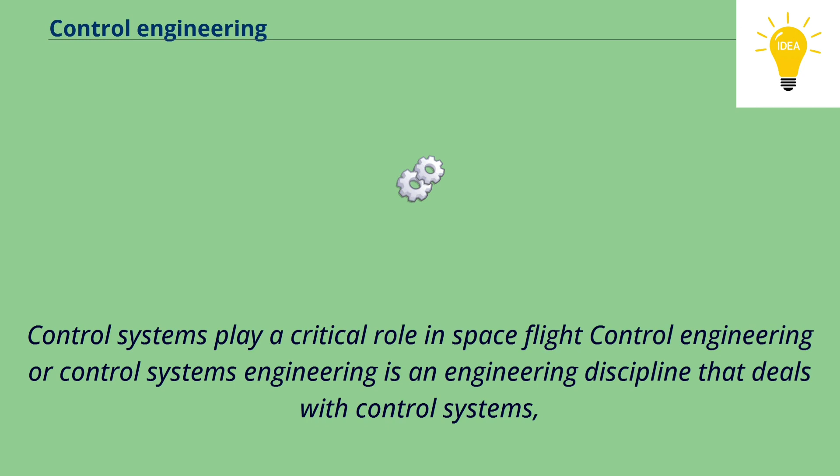Control systems play a critical role in space flight. Control engineering or control systems engineering is an engineering discipline that deals with control systems, applying control theory to design equipment and systems with desired behaviors in control environments.

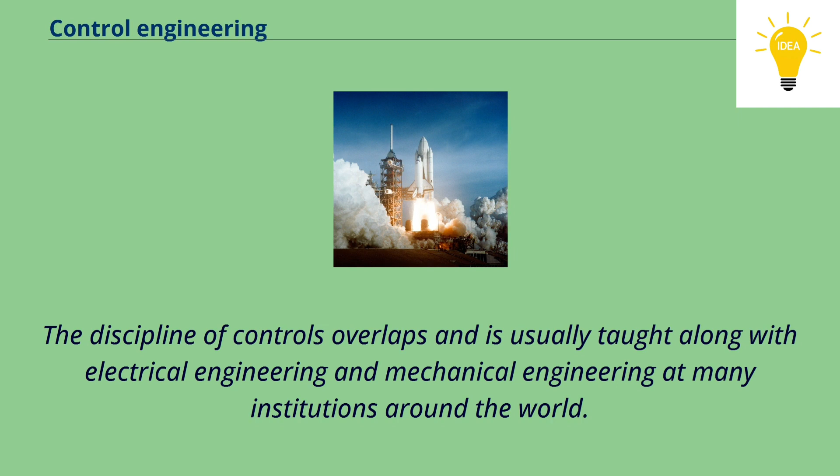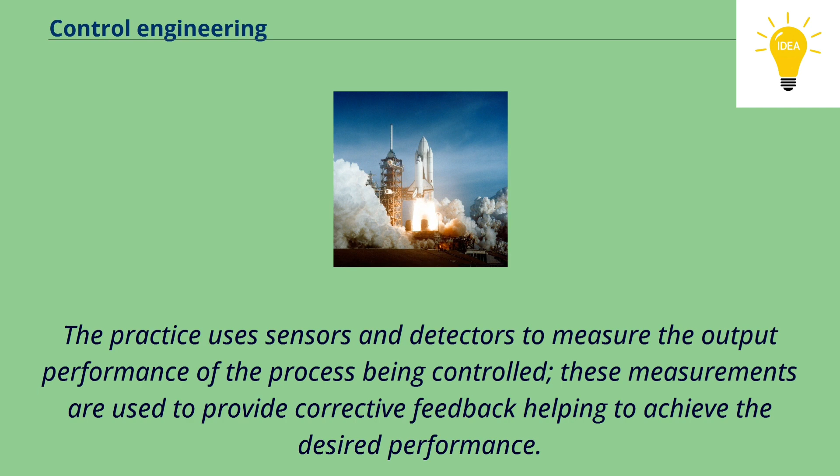The discipline of controls overlaps and is usually taught along with electrical engineering and mechanical engineering at many institutions around the world. The practice uses sensors and detectors to measure the output performance of the process being controlled. These measurements are used to provide corrective feedback, helping to achieve the desired performance. Systems designed to perform without requiring human input are called automatic control systems.

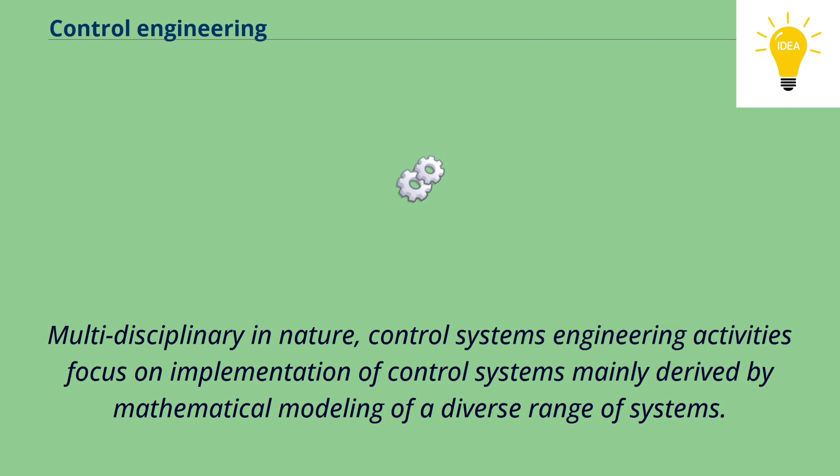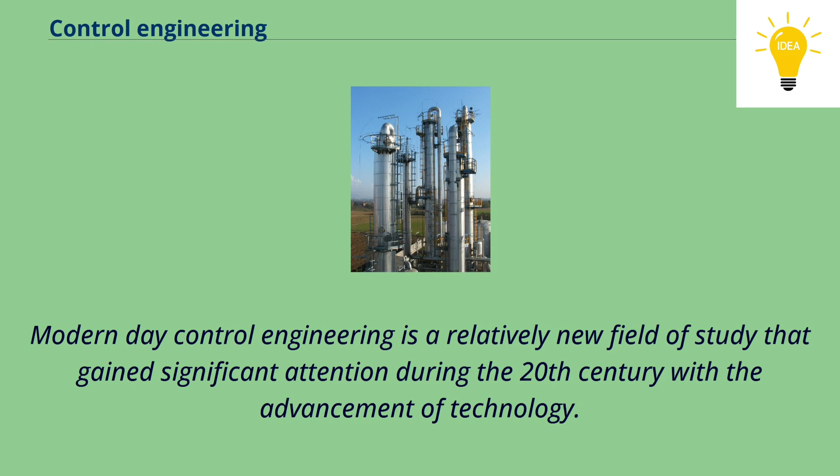Multidisciplinary in nature, control systems engineering activities focus on implementation of control systems mainly derived by mathematical modeling of a diverse range of systems. Modern-day control engineering is a relatively new field of study that gained significant attention during the 20th century with the advancement of technology. It can be broadly defined or classified as practical application of control theory.

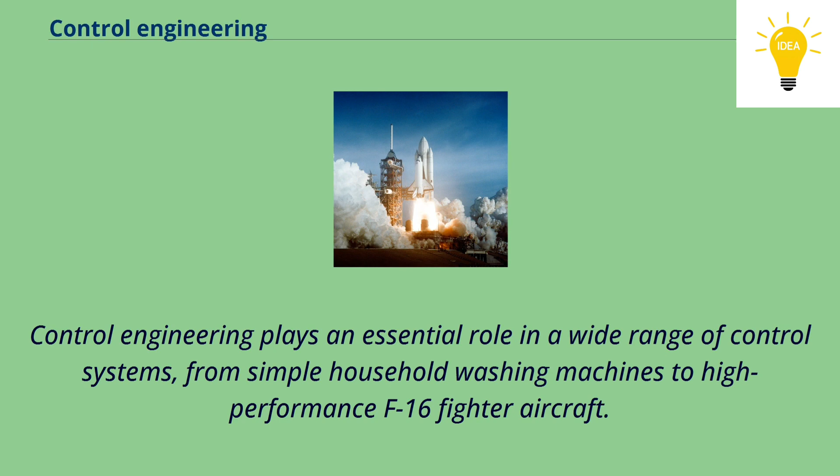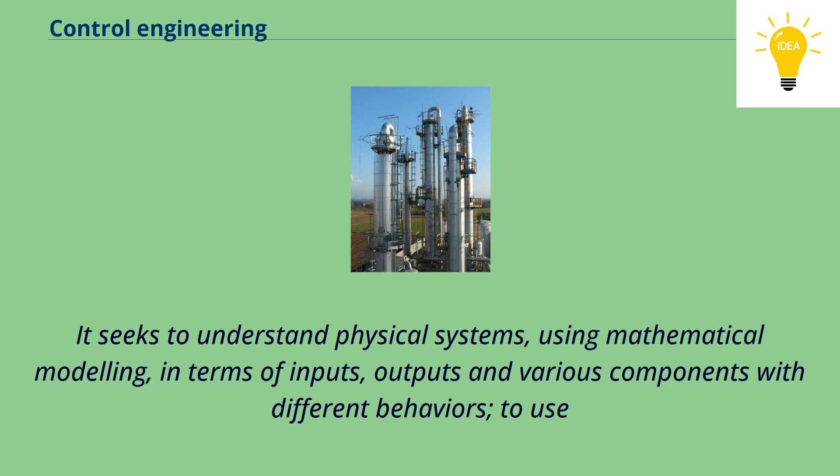Control engineering plays an essential role in a wide range of control systems, from simple household washing machines to high-performance F-16 fighter aircraft. It seeks to understand physical systems, using mathematical modeling, in terms of inputs, outputs and various components with different behaviors, to use control system design tools to develop controllers for those systems, and to implement controllers in physical systems employing available technology.

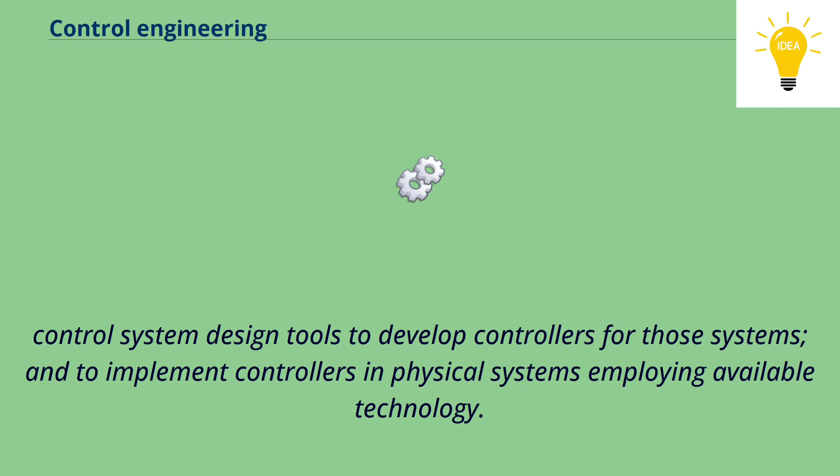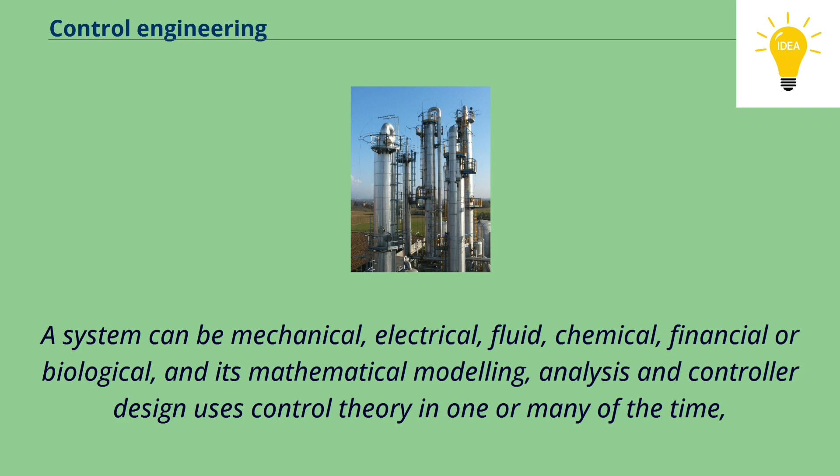A system can be mechanical, electrical, fluid, chemical, financial or biological, and its mathematical modeling, analysis and controller design uses control theory in one or many of the time, frequency and complex s-domains, depending on the nature of the design problem. Control of fractionating columns is one of the more challenging applications.

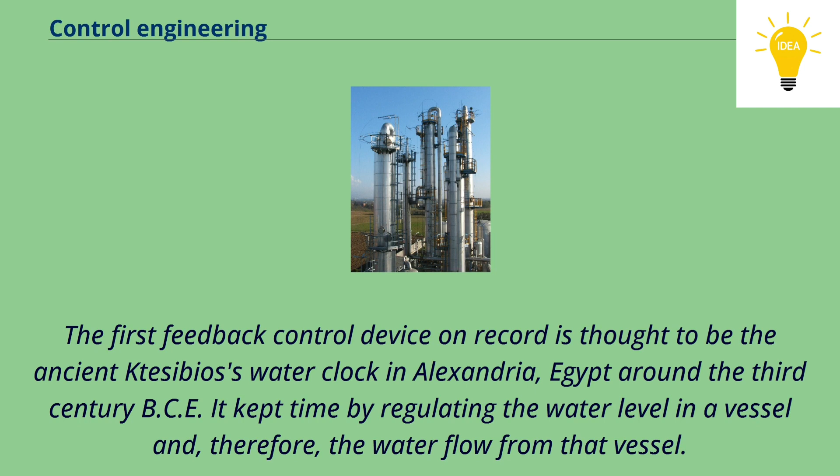Automatic control systems were first developed over 2,000 years ago. The first feedback control device on record is thought to be the ancient Ktesibios's water clock in Alexandria, Egypt around the 3rd century BCE. It kept time by regulating the water level in a vessel and, therefore, the water flow from that vessel. This certainly was a successful device, as water clocks of similar design were still being made in Baghdad when the Mongols captured the city in 1258 AD.

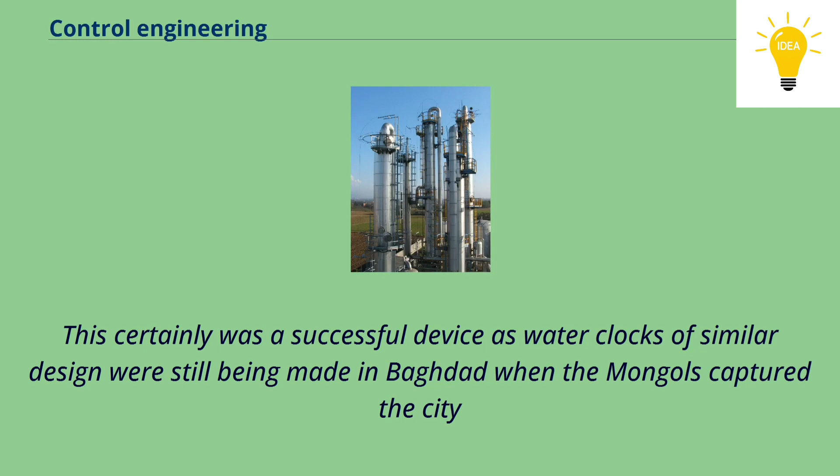A variety of automatic devices have been used over the centuries to accomplish useful tasks, or simply just to entertain. The latter includes the automata, popular in Europe in the 17th and 18th centuries, featuring dancing figures that would repeat the same task over and over again. These automata are examples of open-loop control.

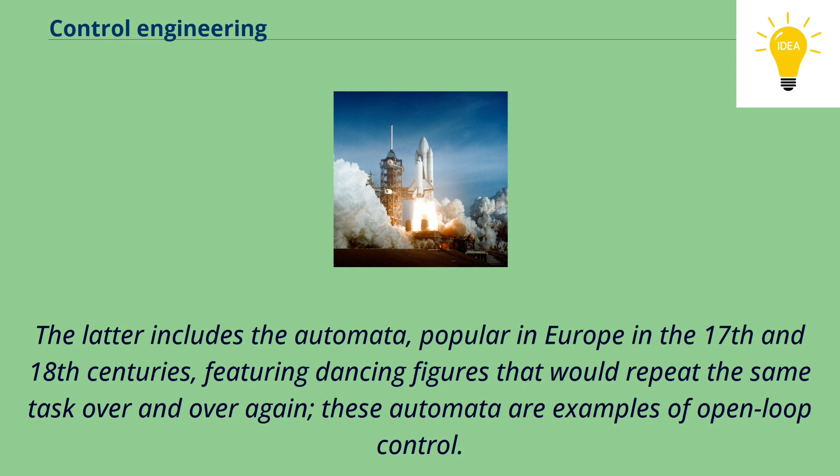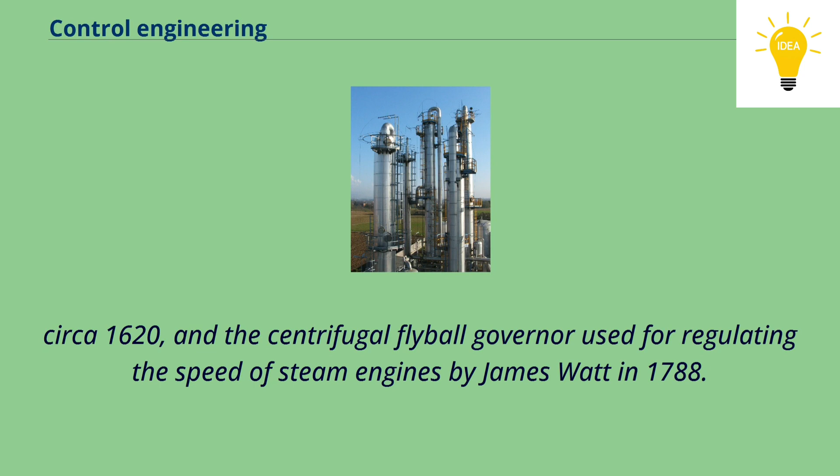Milestones among feedback, or closed-loop automatic control devices, include the temperature regulator of a furnace attributed to Drebbel, circa 1620, and the centrifugal flyball governor used for regulating the speed of steam engines by James Watt in 1788. In his 1868 paper on governors, James Clerk Maxwell was able to explain instabilities exhibited by the flyball governor using differential equations to describe the control system.

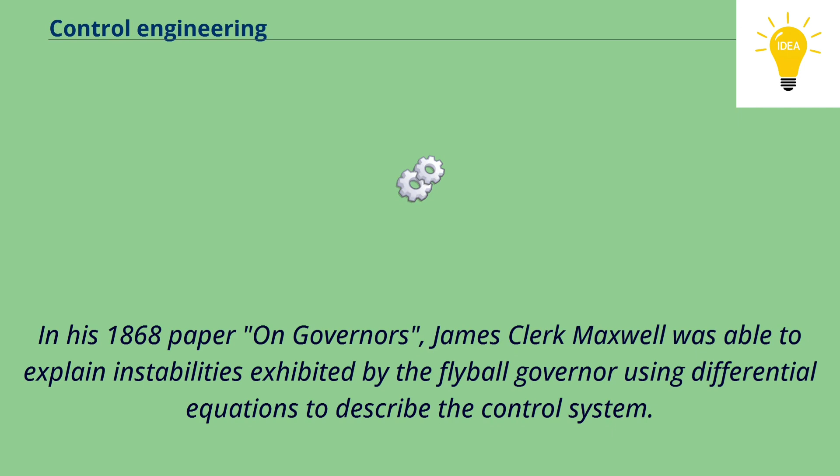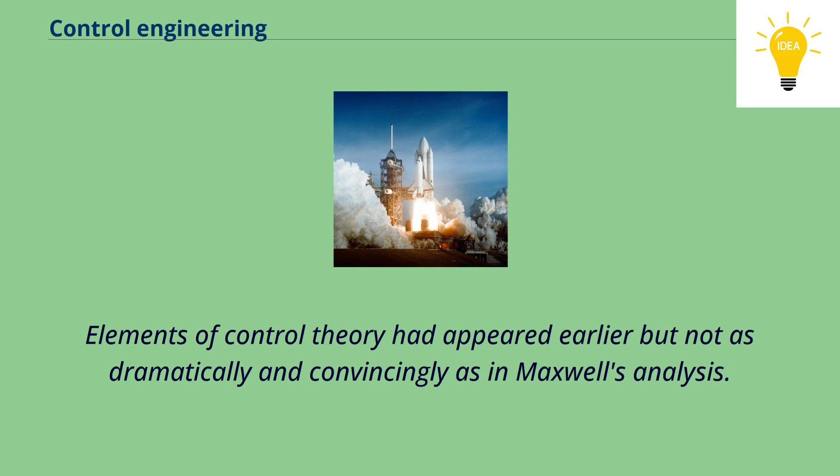This demonstrated the importance and usefulness of mathematical models and methods in understanding complex phenomena, and it signaled the beginning of mathematical control and systems theory. Elements of control theory had appeared earlier, but not as dramatically and convincingly as in Maxwell's analysis. Control theory made significant strides over the next century.

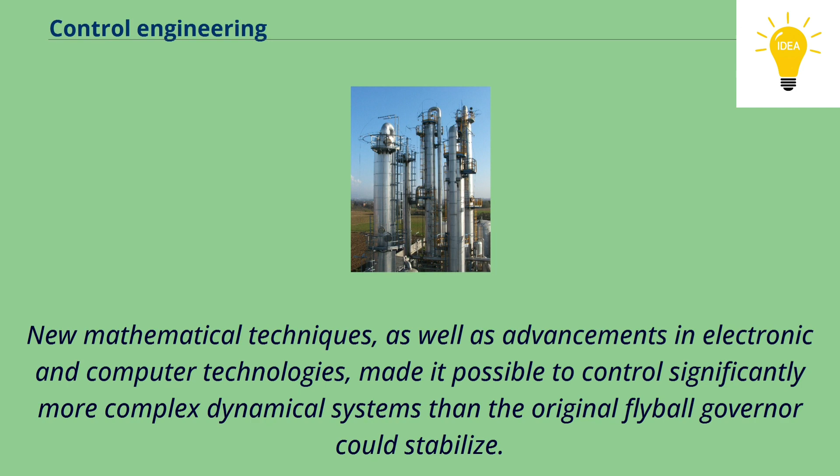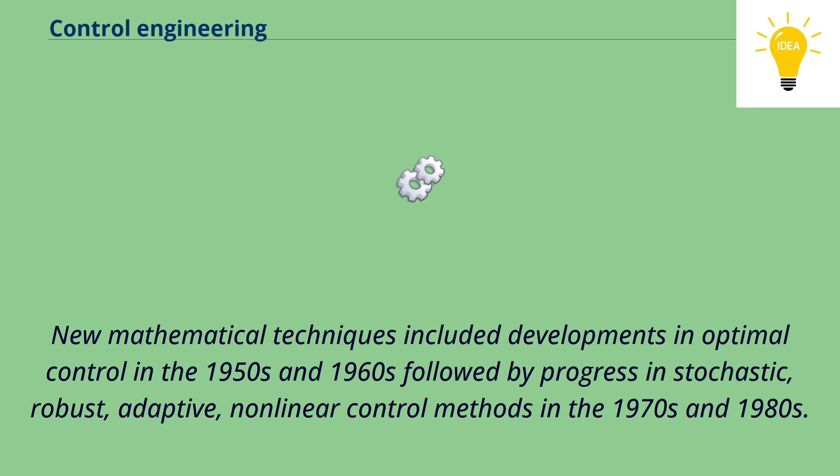New mathematical techniques, as well as advancements in electronic and computer technologies, made it possible to control significantly more complex dynamical systems than the original flyball governor could stabilize. New mathematical techniques included developments in optimal control in the 1950s and 1960s, followed by progress in stochastic, robust, adaptive, nonlinear control methods in the 1970s and 1980s.

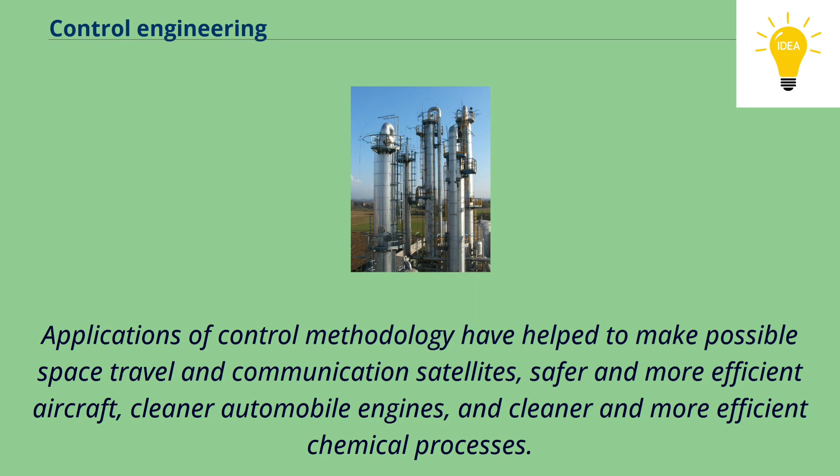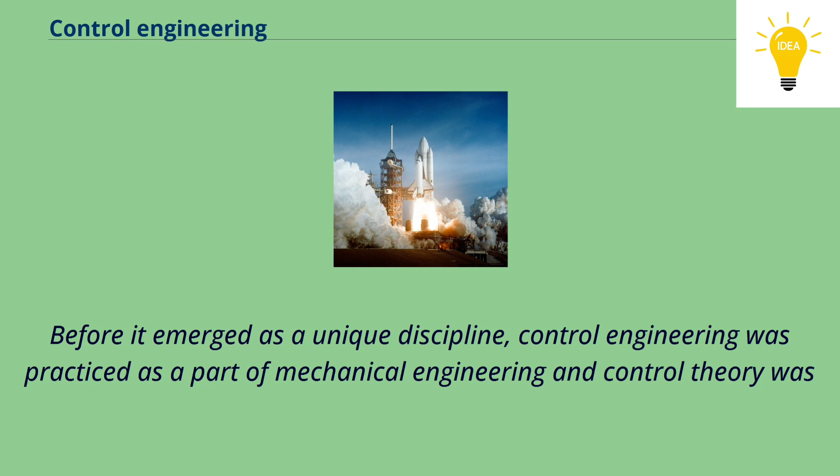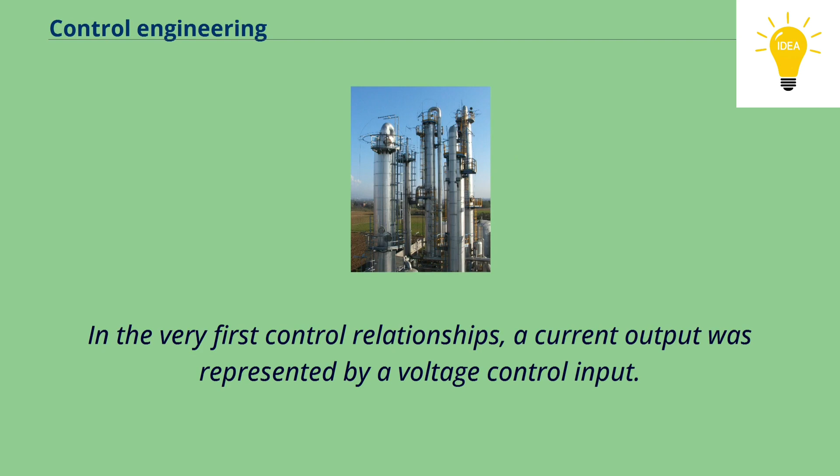Applications of control methodology have helped to make possible space travel and communication satellites, safer and more efficient aircraft, cleaner automobile engines, and cleaner and more efficient chemical processes. Before it emerged as a unique discipline, control engineering was practiced as a part of mechanical engineering, and control theory was studied as a part of electrical engineering, since electrical circuits can often be easily described using control theory techniques. In the very first control relationships, a current output was represented by a voltage control input.

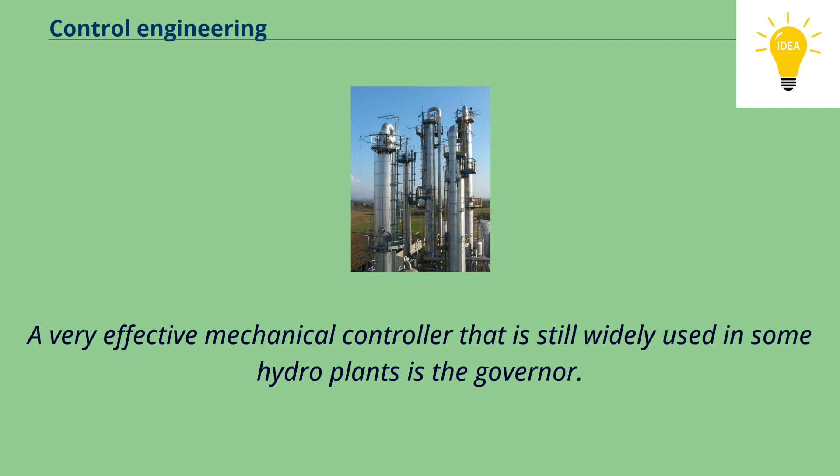However, not having adequate technology to implement electrical control systems, designers were left with the option of less efficient and slow-responding mechanical systems. A very effective mechanical controller that is still widely used in some hydro plants is the governor. Later on, previous to modern power electronics, process control systems for industrial applications were devised by mechanical engineers using pneumatic and hydraulic control devices, many of which are still in use today.

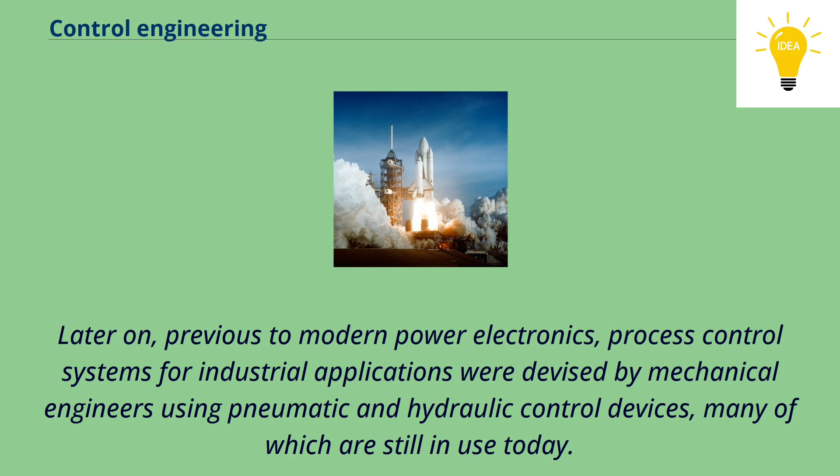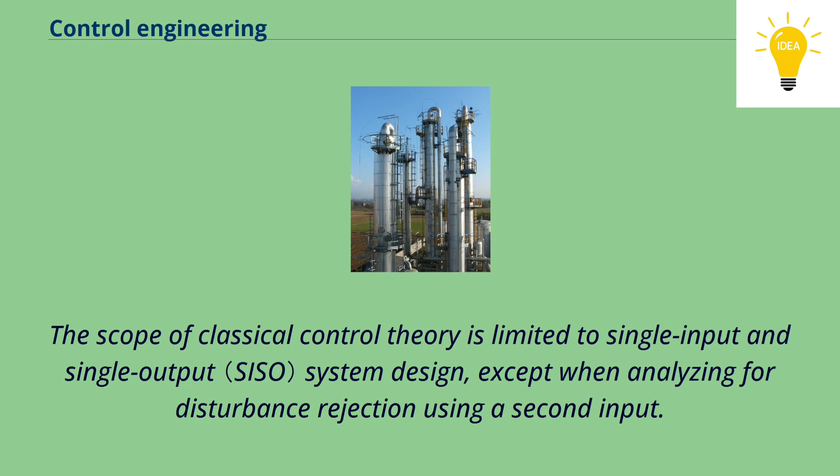There are two major divisions in control theory, namely, classical and modern, which have direct implications for the control engineering applications. The scope of classical control theory is limited to single input and single output system design, except when analyzing for disturbance rejection using a second input. The system analysis is carried out in the time domain using differential equations, in the complex S domain with the Laplace transform, or in the frequency domain by transforming from the complex S domain.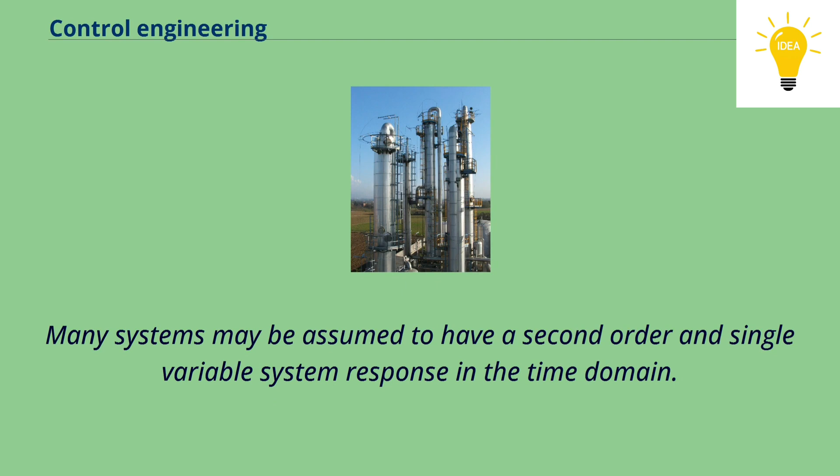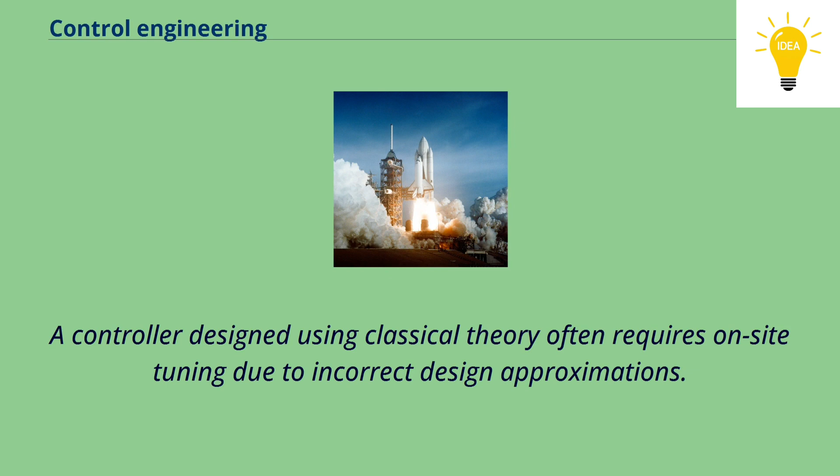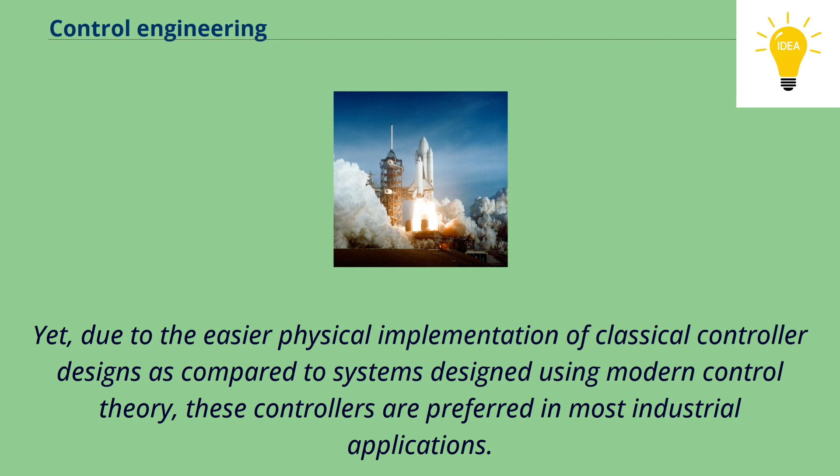Many systems may be assumed to have a second-order and single-variable system response in the time domain. A controller designed using classical theory often requires on-site tuning due to incorrect design approximations. Yet, due to the easier physical implementation of classical controller designs as compared to systems designed using modern control theory, these controllers are preferred in most industrial applications. The most common controllers designed using classical control theory are PID controllers. A less common implementation may include either or both a lead or lag filter.

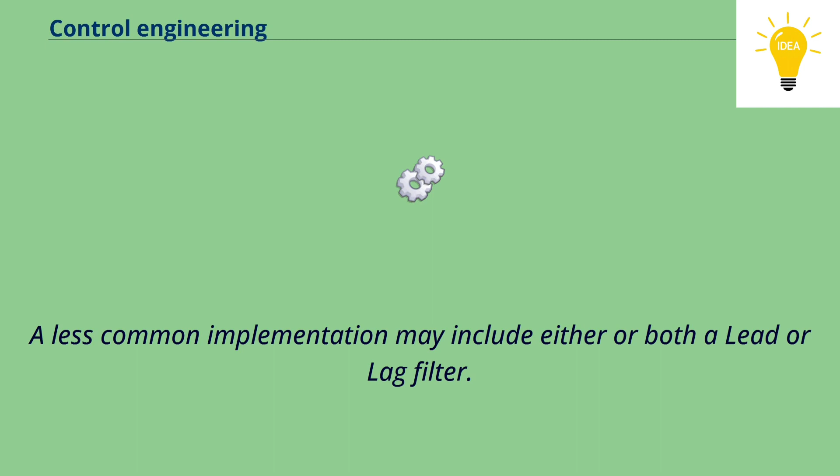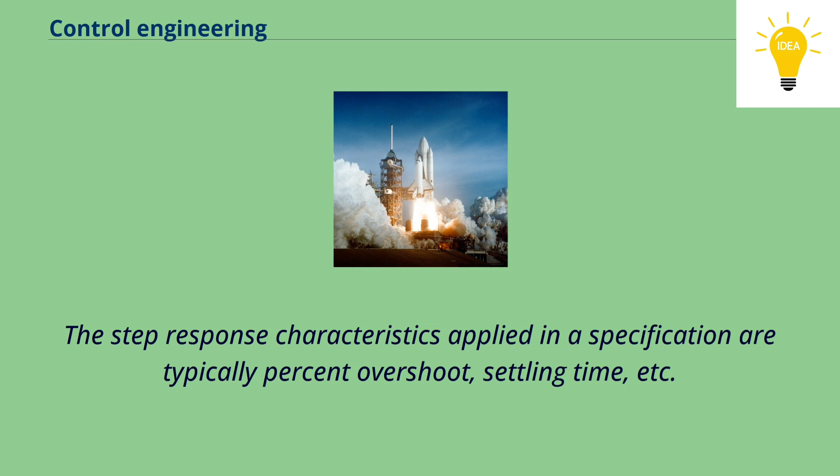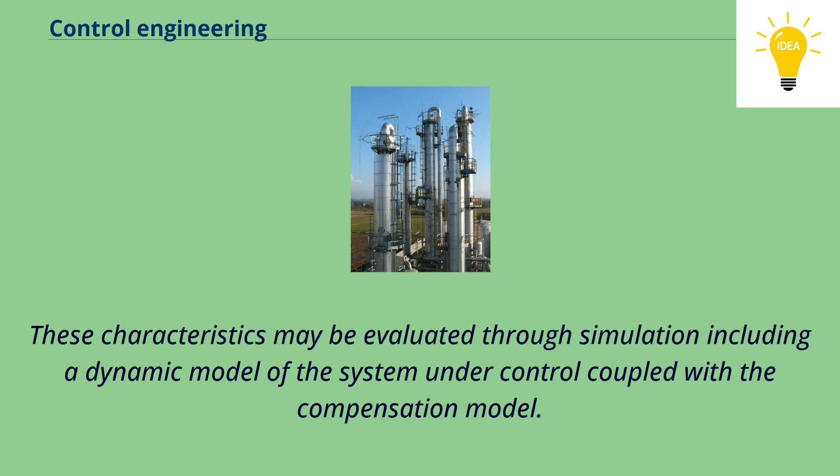The ultimate end goal is to meet requirements typically provided in the time domain called the step response, or at times in the frequency domain called the open loop response. The step response characteristics applied in a specification are typically percent overshoot, settling time, etc. The open loop response characteristics applied in a specification are typically gain and phase margin and bandwidth. These characteristics may be evaluated through simulation, including a dynamic model of the system under control coupled with the compensation model.

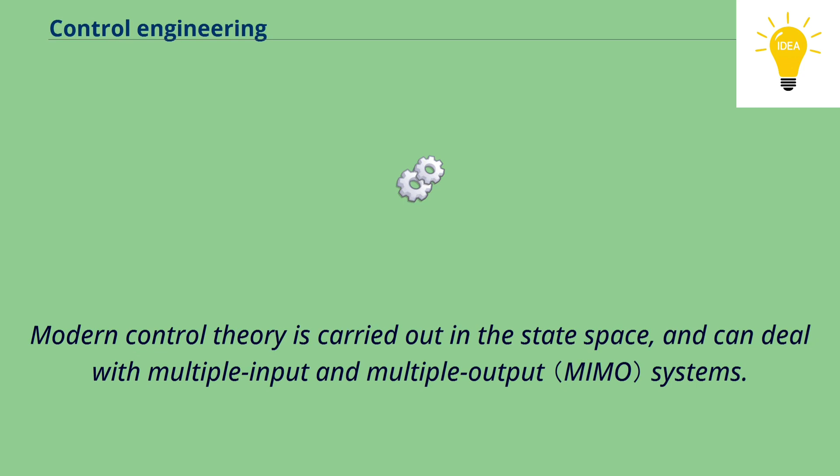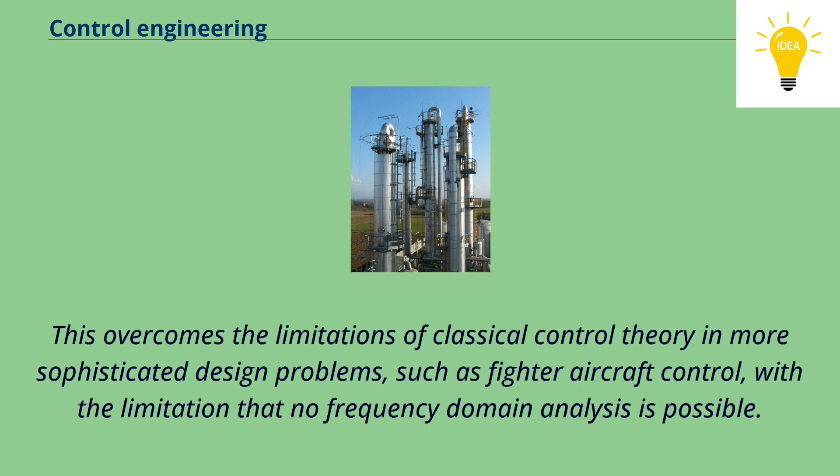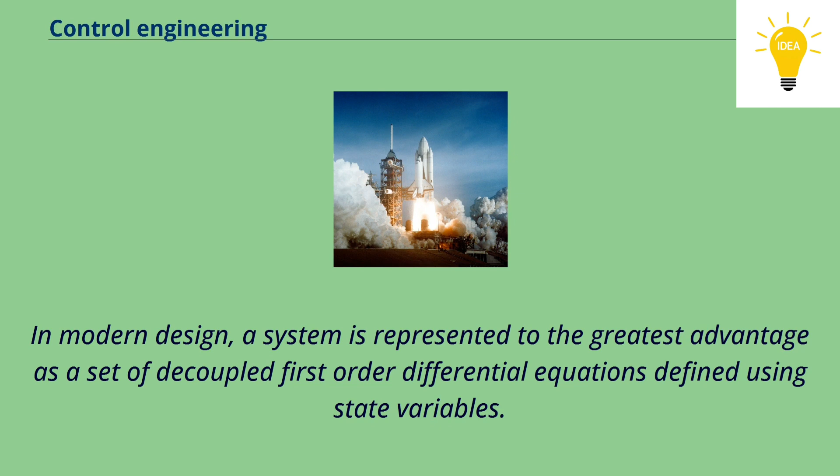Modern control theory is carried out in the state space, and can deal with multiple input and multiple output systems. This overcomes the limitations of classical control theory in more sophisticated design problems, such as fighter aircraft control, with the limitation that no frequency domain analysis is possible. In modern design, a system is represented to the greatest advantage as a set of decoupled first-order differential equations defined using state variables. Nonlinear, multivariable, adaptive and robust control theories come under this division.

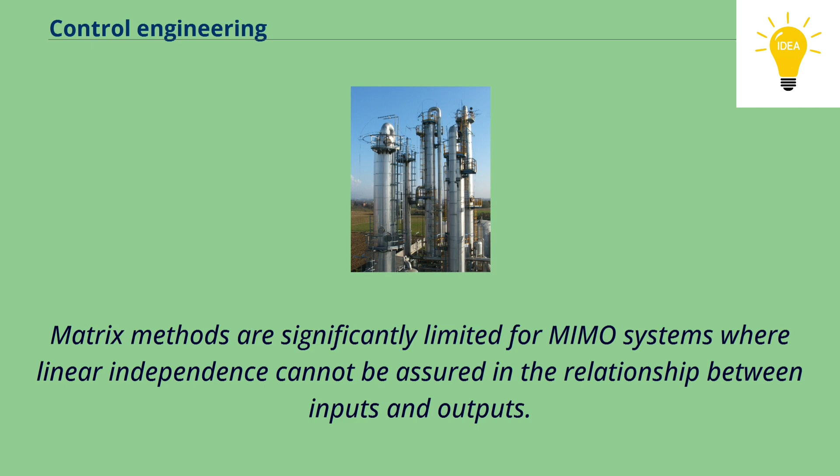Matrix methods are significantly limited for MIMO systems where linear independence cannot be assured in the relationship between inputs and outputs. Being fairly new, modern control theory has many areas yet to be explored. Scholars like Rudolf E. Kalman and Aleksandr Lyapunov are well known among the people who have shaped modern control theory.

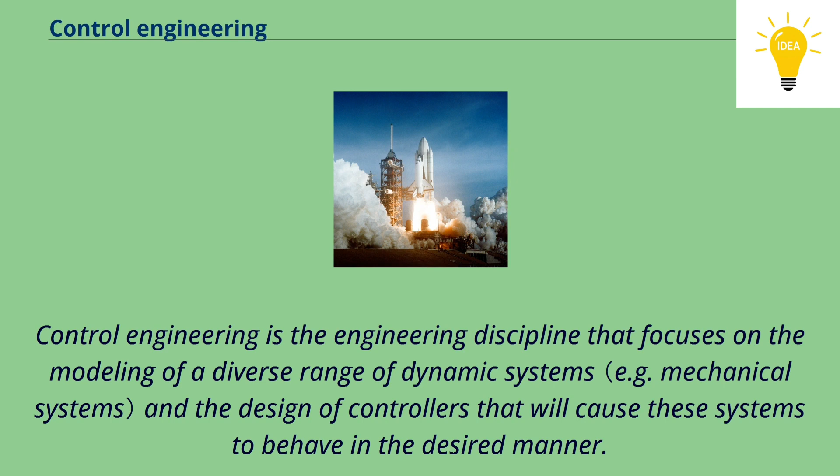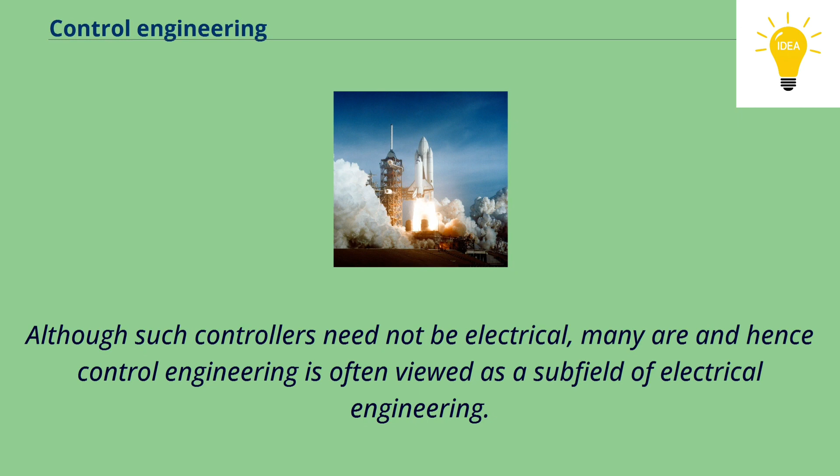Control engineering is the engineering discipline that focuses on the modeling of a diverse range of dynamic systems and the design of controllers that will cause these systems to behave in the desired manner. Although such controllers need not be electrical, many are, and hence control engineering is often viewed as a subfield of electrical engineering. Electrical circuits, digital signal processors and microcontrollers can all be used to implement control systems. Control engineering has a wide range of applications from the flight and propulsion systems of commercial airliners to the cruise control present in many modern automobiles.

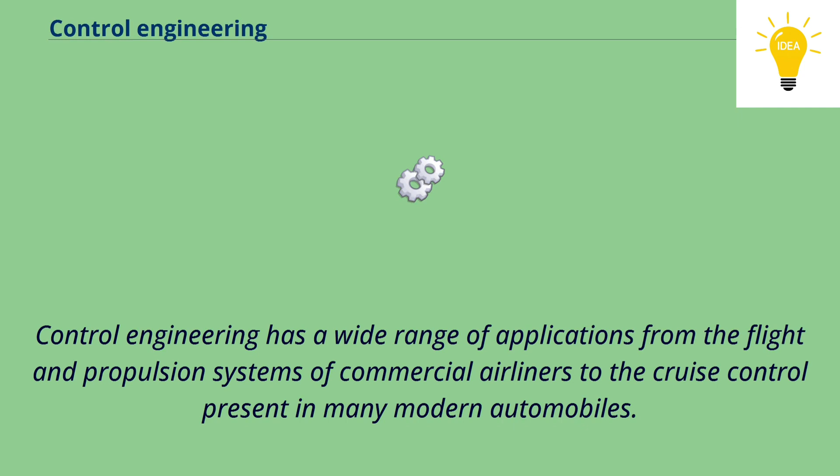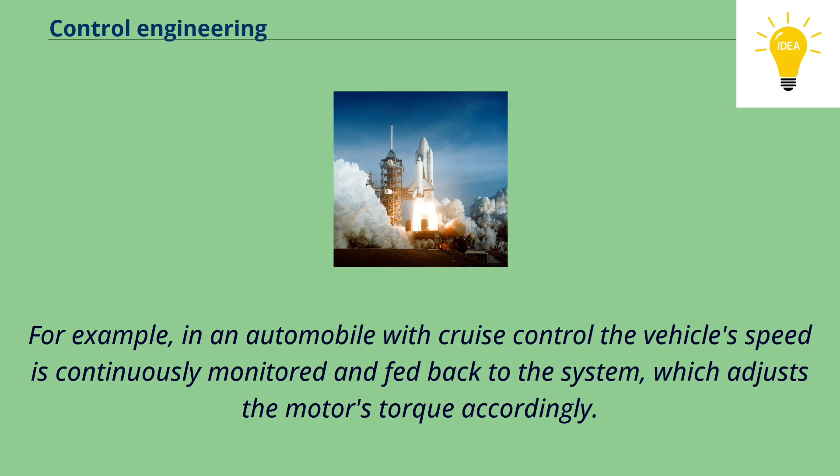In most cases, control engineers utilize feedback when designing control systems. This is often accomplished using a PID controller system. For example, in an automobile with cruise control, the vehicle's speed is continuously monitored and fed back to the system, which adjusts the motor's torque accordingly. Where there is regular feedback, control theory can be used to determine how the system responds to such feedback. In practically all such systems, stability is important, and control theory can help ensure stability is achieved.

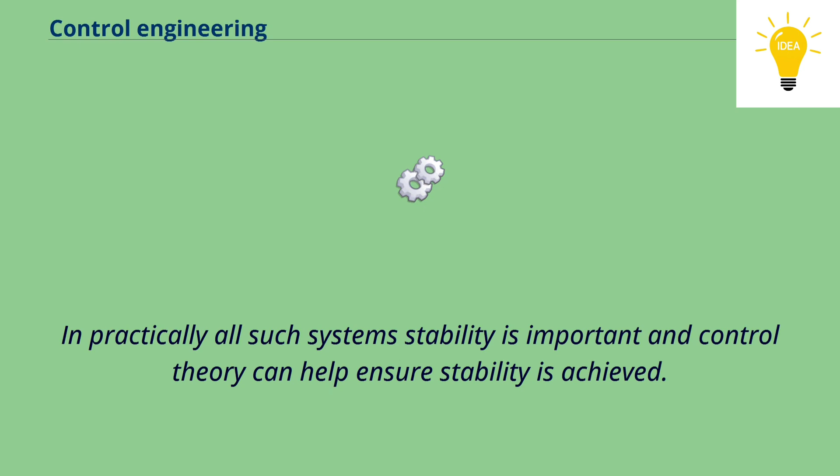Although feedback is an important aspect of control engineering, control engineers may also work on the control of systems without feedback. This is known as open-loop control. A classic example of open-loop control is a washing machine that runs through a predetermined cycle without the use of sensors.

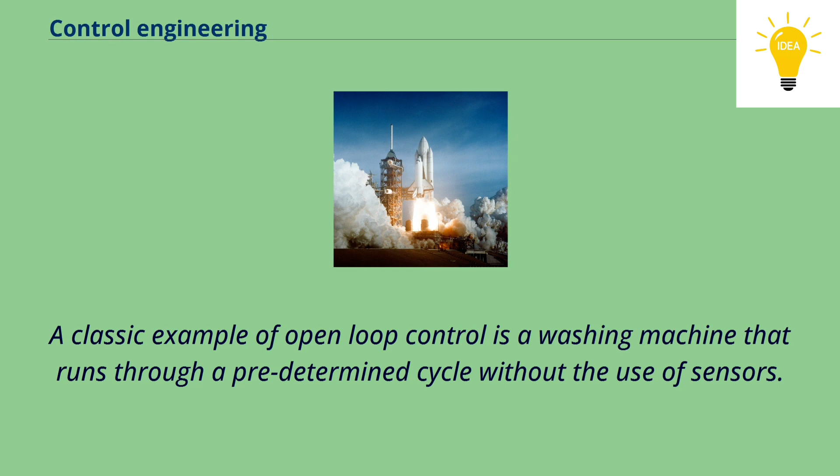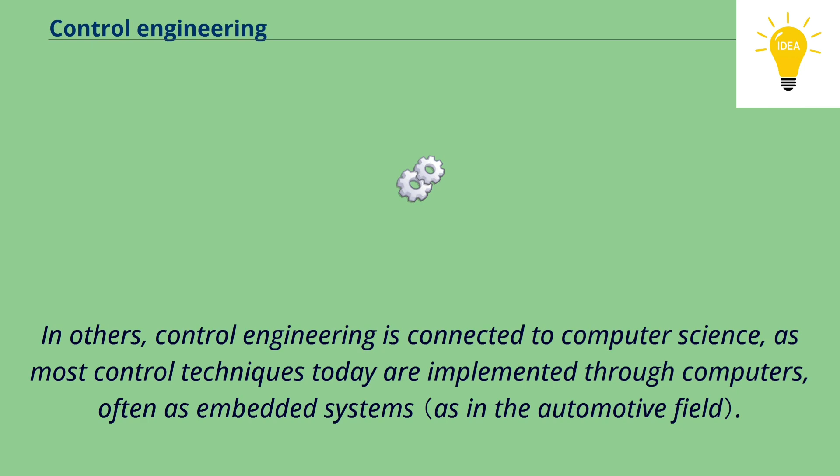At many universities around the world, control engineering courses are taught primarily in electrical engineering and mechanical engineering, but some courses can be instructed in mechatronics engineering and aerospace engineering. In others, control engineering is connected to computer science, as most control techniques today are implemented through computers, often as embedded systems.

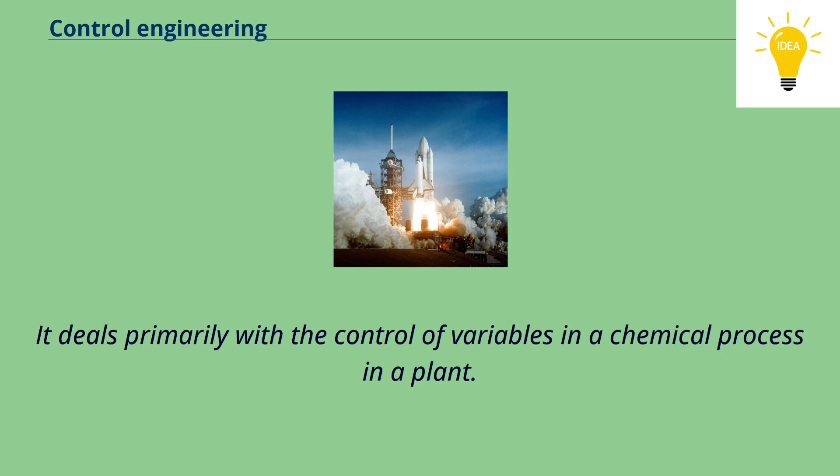The field of control within chemical engineering is often known as process control. It deals primarily with the control of variables in a chemical process in a plant. It is taught as part of the undergraduate curriculum of any chemical engineering program and employs many of the same principles in control engineering. Other engineering disciplines also overlap with control engineering, as it can be applied to any system for which a suitable model can be derived.

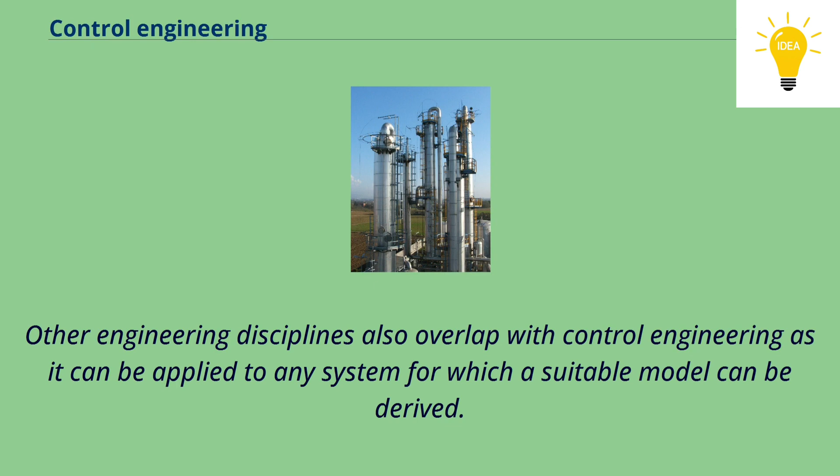However, specialized control engineering departments do exist, for example, the Department of Automatic Control and Systems Engineering at the University of Sheffield and the Department of Robotics and Control Engineering at the United States Naval Academy. Control engineering has diversified applications that include science, finance management, and even human behavior.

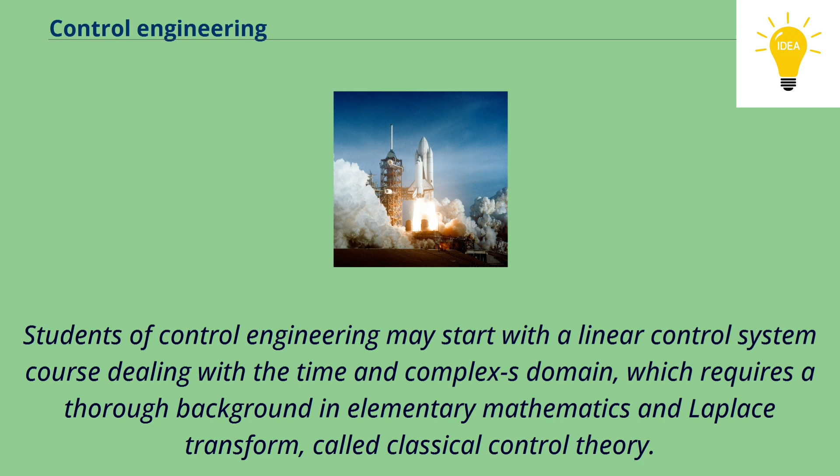Students of control engineering may start with a linear control system course dealing with the time and complex S domain, which requires a thorough background in elementary mathematics and Laplace transform, classical control theory. In linear control, the student does frequency and time domain analysis. Digital control and nonlinear control courses require Z transformation and algebra respectively, and could be said to complete a basic control education.

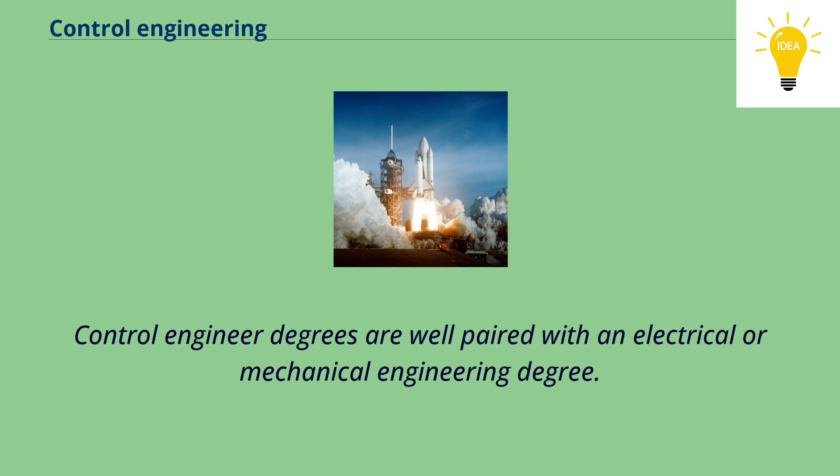A control engineer's career starts with a bachelor's degree and can continue through the college process. Control engineer degrees are well paired with an electrical or mechanical engineering degree. Control engineers usually get jobs in technical managing where they typically lead interdisciplinary projects. There are many job opportunities in aerospace companies, manufacturing companies, automobile companies, power companies, and government agencies. Some places that hire control engineers include companies such as Rockwell Automation, NASA, Ford, and Goodrich.

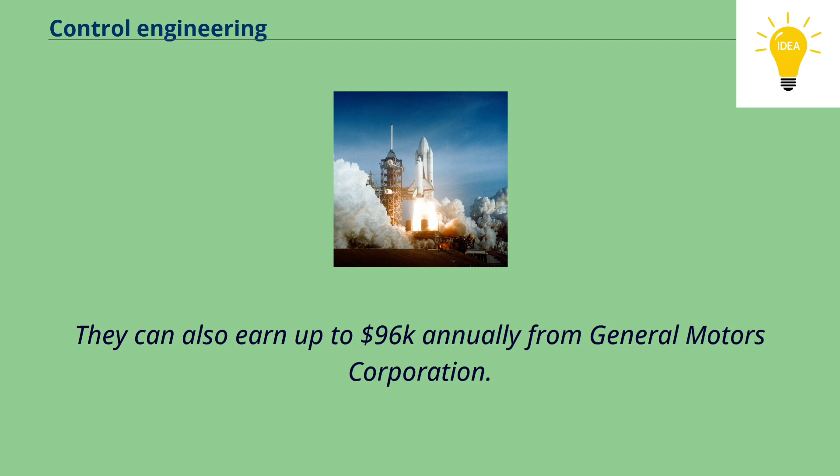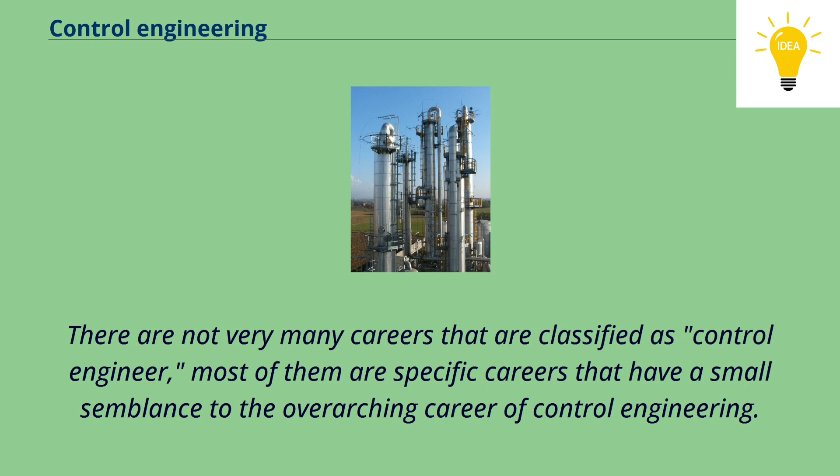Control engineers can possibly earn $66,000 annually from Lockheed Martin Corporation. They can also earn up to $96,000 annually from General Motors Corporation. According to a control engineering survey, most of the people who answered were control engineers in various forms of their own career. There are not very many careers that are classified as control engineer. Most of them are specific careers that have a small semblance to the overarching career of control engineering.

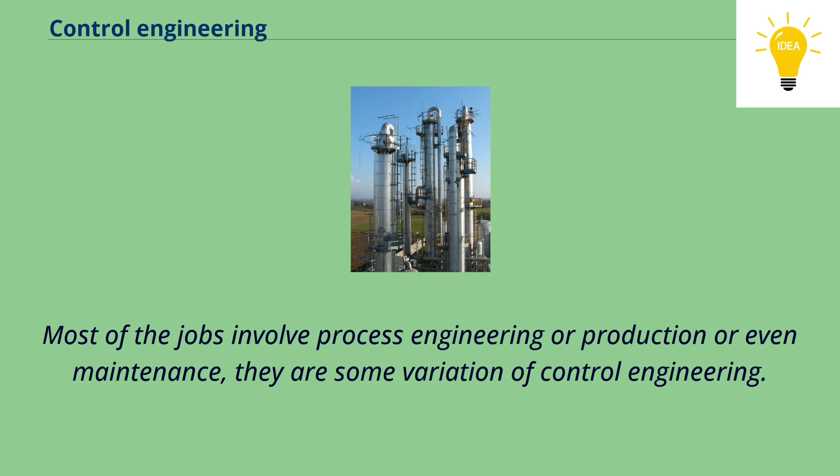A majority of the control engineers that took the survey in 2019 are system or product designers, or even control or instrument engineers. Most of the jobs involve process engineering or production or even maintenance. They are some variation of control engineering.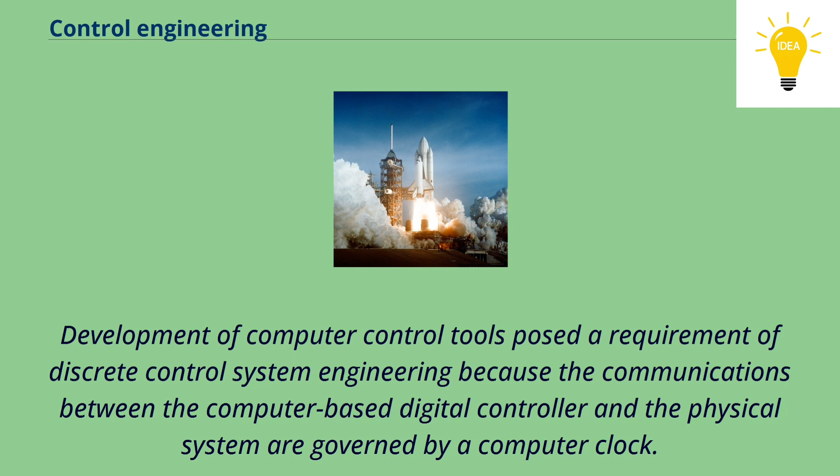Originally, control engineering was all about continuous systems. Development of computer control tools posed a requirement of discrete control system engineering because the communications between the computer-based digital controller and the physical system are governed by a computer clock. The equivalent to Laplace transform in the discrete domain is the Z transform.

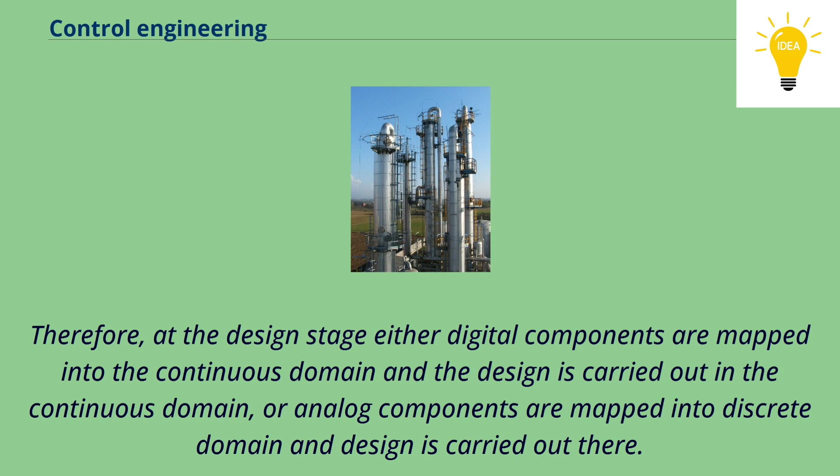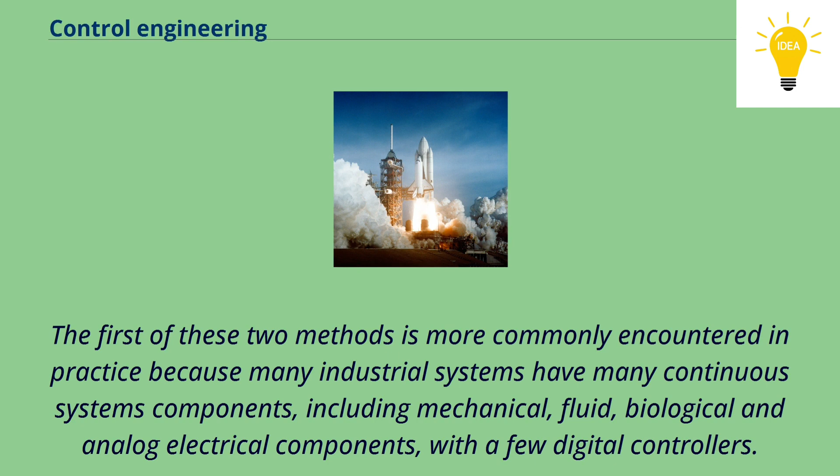Today, many of the control systems are computer controlled and they consist of both digital and analog components. Therefore, at the design stage either digital components are mapped into the continuous domain and the design is carried out in the continuous domain, or analog components are mapped into discrete domain and design is carried out there. The first of these two methods is more commonly encountered in practice because many industrial systems have many continuous systems components, including mechanical, fluid, biological and analog electrical components, with a few digital controllers.

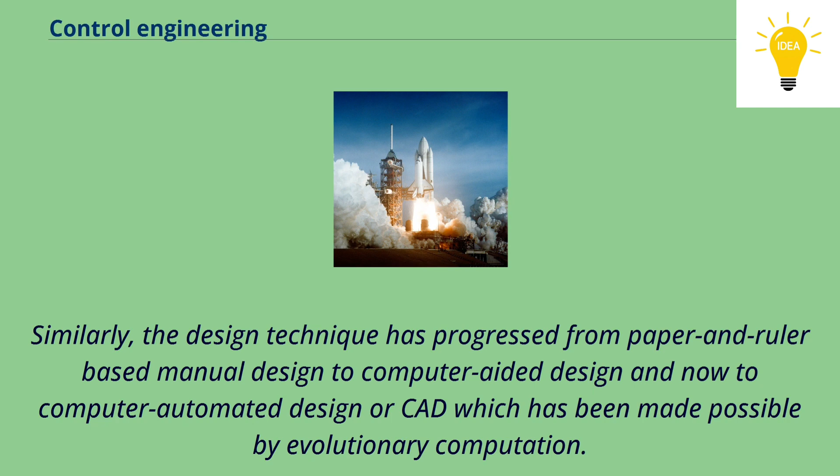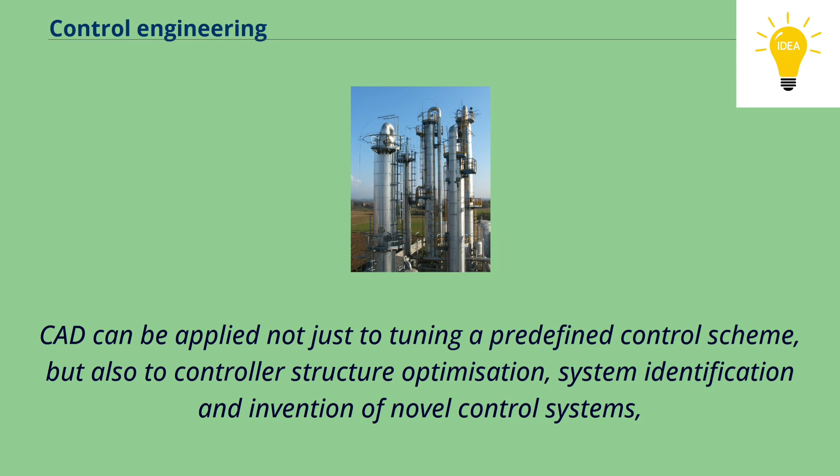Similarly, the design technique has progressed from paper and ruler-based manual design to computer-aided design and now to computer-automated design or CAD, which has been made possible by evolutionary computation. CAD can be applied not just to tuning a predefined control scheme, but also to controller structure optimization, system identification and invention of novel control systems, based purely upon a performance requirement, independent of any specific control scheme.

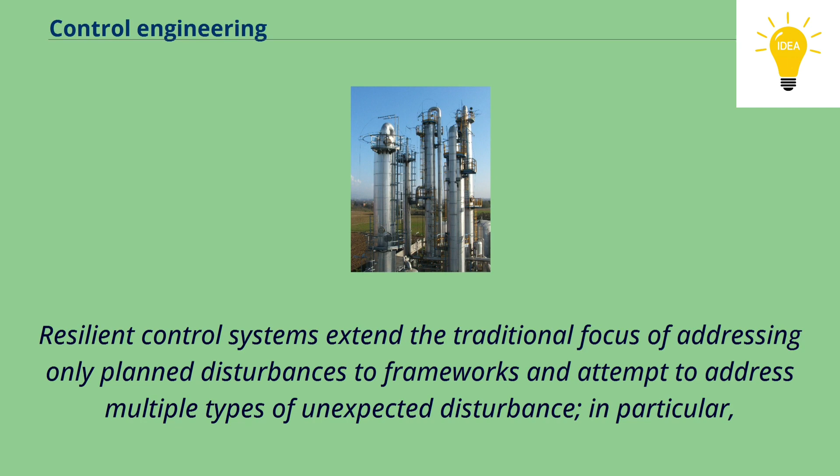Resilient control systems extend the traditional focus of addressing only planned disturbances to frameworks and attempt to address multiple types of unexpected disturbance, in particular, adapting and transforming behaviors of the control system in response to malicious actors, abnormal failure modes, undesirable human action, etc.